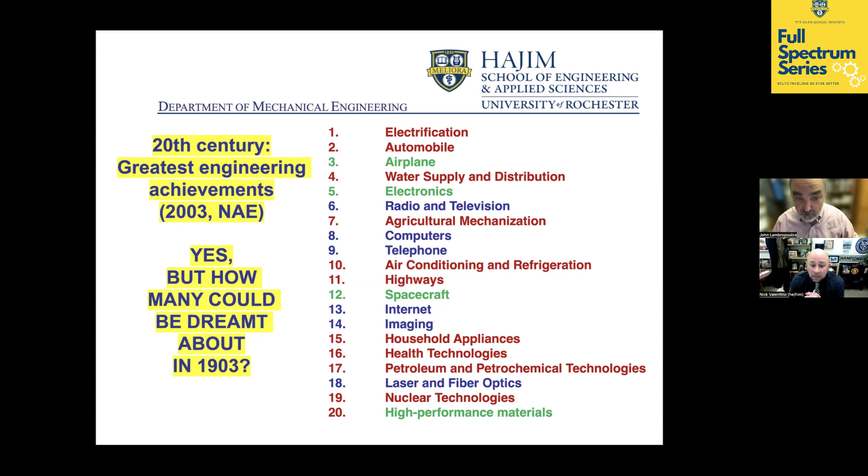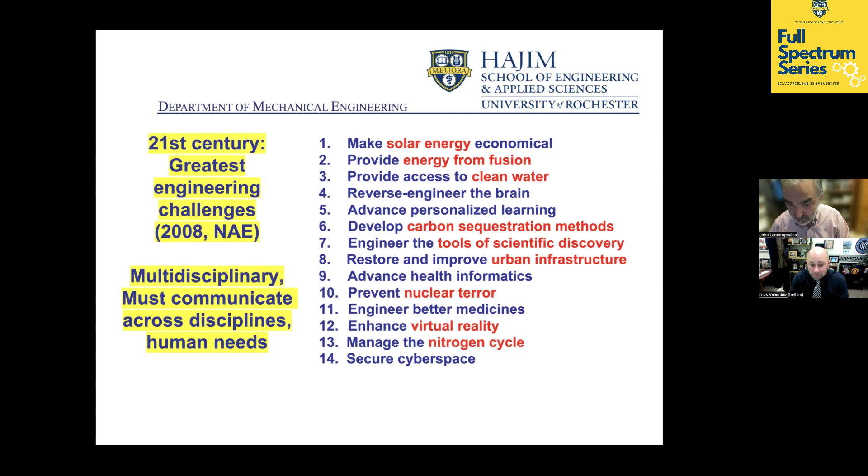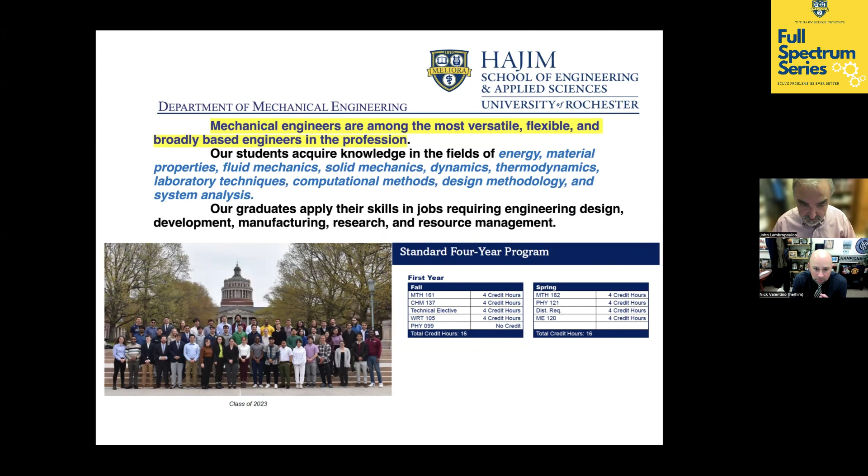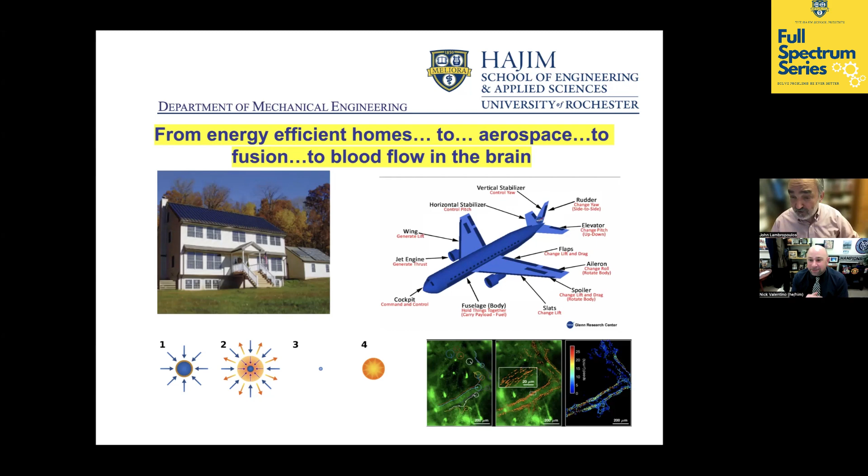We get reminded of that being so close to the airport on campus. You'll see a massive plane fly by, and they're like, 'Oh my gosh, it actually flies.' We're about 6 miles from the Rochester airport, so on the U of R campus you see aircraft flying over the campus all the time. We admire it all the time.

Let me talk about something I haven't quite mentioned explicitly, and that is engineering is a profession. I want to emphasize this. Just like every profession, we have a professional code of ethics. I always ask, if I give this as a live presentation to students, does anybody here think of themselves as not being ethical? Of course, nobody. We all think of ourselves as being ethical. Every single person thinks, of course I have my personal ethics. But the point I want to make is the distinction between professional ethics and personal ethics.

In order to highlight this, I have a purpose statement, and I ask the students or anybody else, is this true or false? 'Engineers, in the fulfillment of their professional duties, must carefully consider the safety, health, and welfare of the public.' This sounds terrific, like apple pie, motherhood. It sounds terrific, but the statement is actually false. It is false because engineers do not merely carefully consider safety — safety must be paramount. I always rephrase this to students: if I have carefully considered the safety of my car, does this mean my car is safe? Safety is the paramount factor in all engineering practice. I cannot overemphasize this.

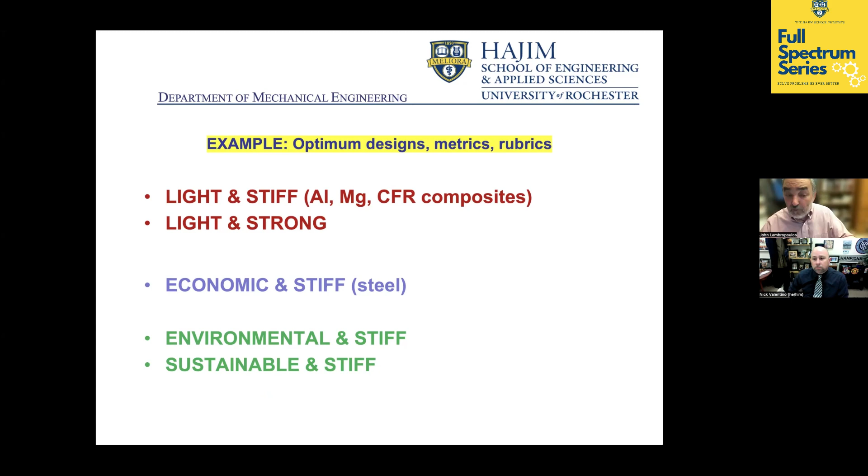What is environmental, what's sustainable, is even a political issue. If you read the literature, the debates of the campaigns, you see what is sustainable, what's environmental, what is economic clearly plays a very big role in our political life.

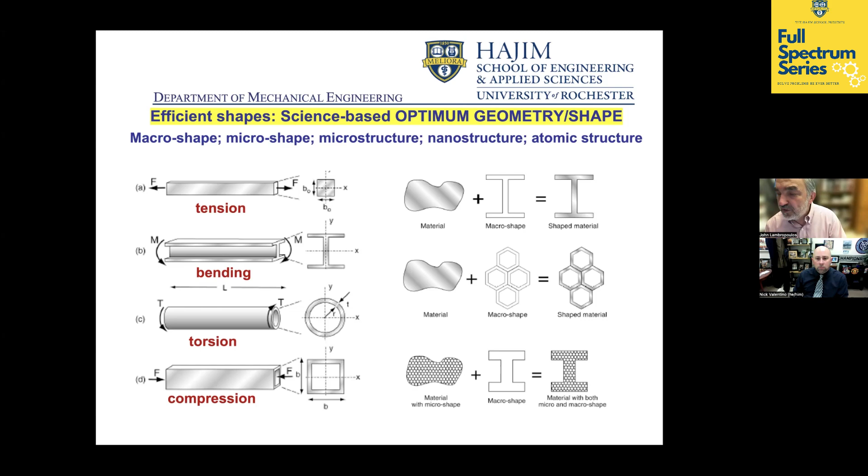Something we emphasize in aerospace engineering is that every complex engineering structure, no matter how complex, is always analyzed in the four fundamental modes of deformation: tension, which may cause breaking; bending; torsion, something that's twisted or torqued; or compression. Each of these materials has a different cross-section. The point I want to emphasize is that these structures are made not just from a solid material, but from a solid material which may have a shape attached to it. So by optimizing the shape, I can optimize the performance of the material while minimizing its weight. That's what aerospace engineering is all about.

I'll give an example of the challenges aerospace engineers face, both for commercial and defense-related aerospace. Here's an example of a gas turbine, which has very high efficiency because it can operate at temperatures up to 1200 degrees Celsius. Just to give an idea, a gas turbine is twice as efficient as a traditional fossil fuel power plant. Twice the efficiency is a tremendous engineering accomplishment, but the temperature required is on the order of 1200 degrees Celsius.

And at that temperature, every known material that we have easy access to is essentially a liquid or like a soft cheese — it becomes almost the consistency of brie. Therefore, I cannot build structures with that.

Therefore, the need for advanced materials that must withstand higher temperatures is a huge capability in aerospace engineering. And therefore, the idea of gas-related technology is important. So let's talk now a little bit about this.

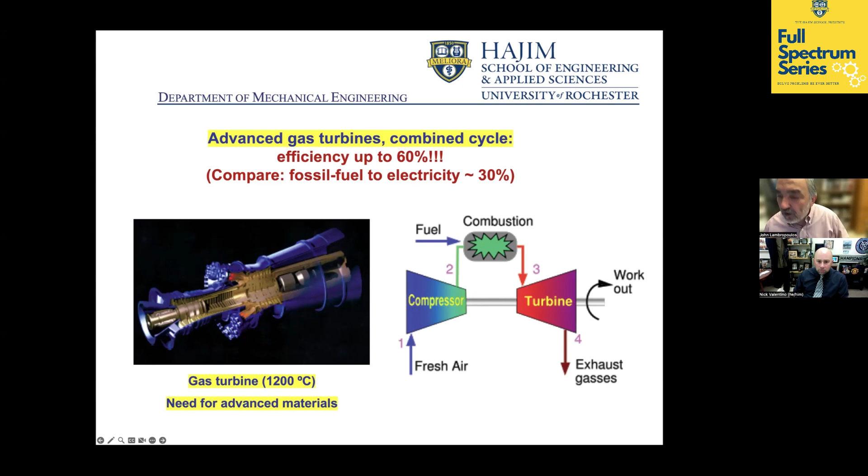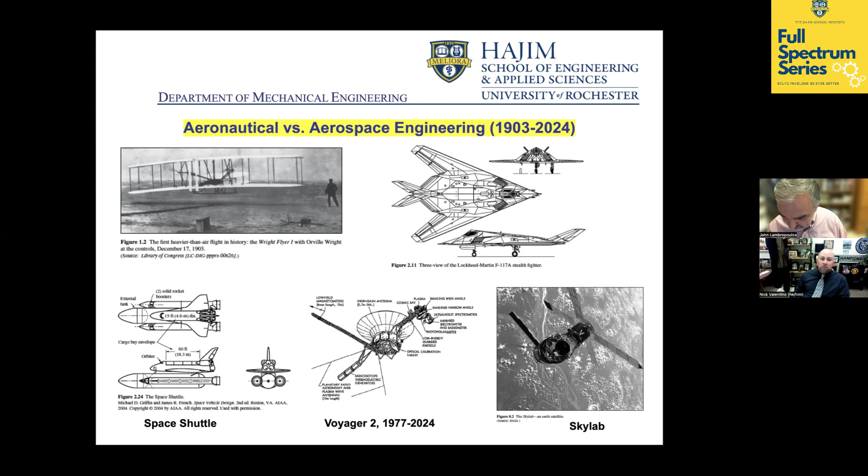Just to give you a more recent example, SpaceX, Elon Musk's very visionary company - one may like or dislike his political inclination, but that's a different story - the technology that makes SpaceX rockets viable and very impressive is that they have these active cooling mechanisms, which are very sophisticated.

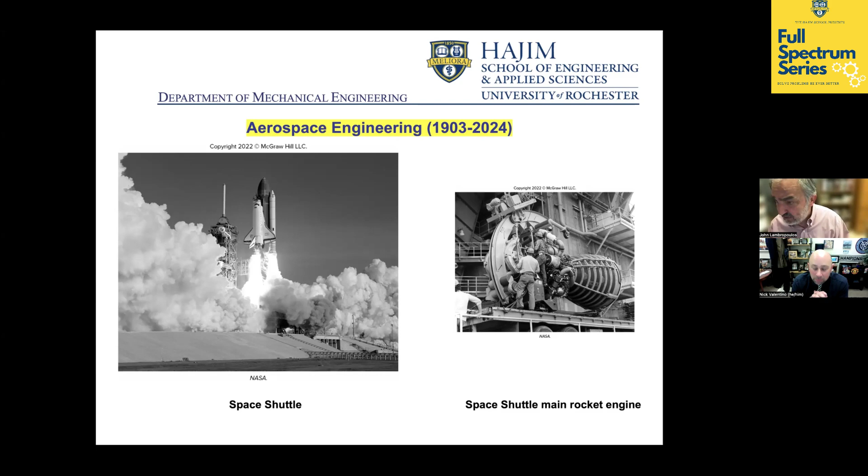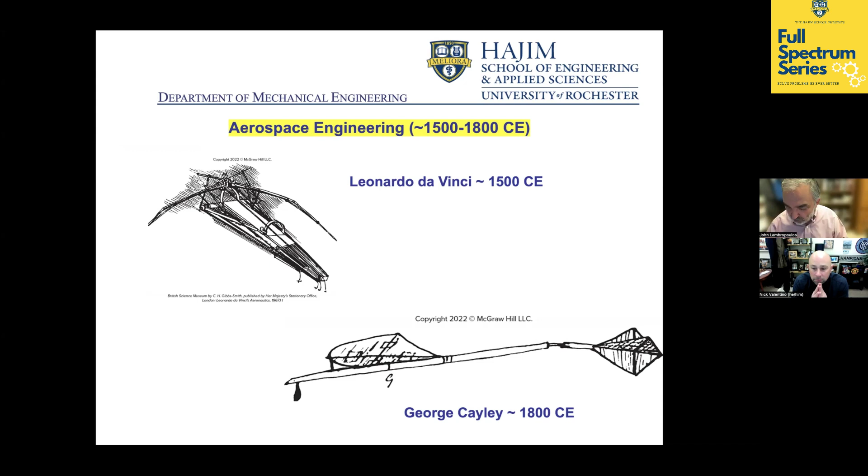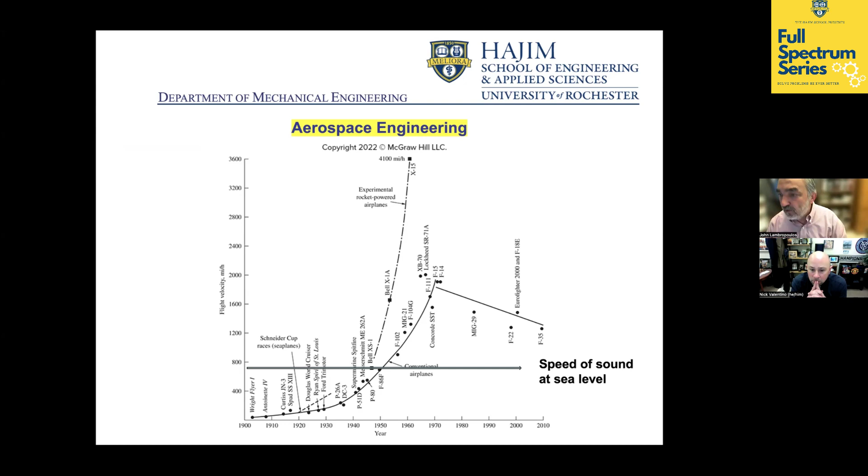I'll talk about this in just a minute. If you look at the data on the right-hand side—MiG, a Russian aircraft, F-22, F-35, the Eurofighter 2000—you'll see that these operate at about Mach number 2, about twice as fast as the speed of sound, which begs a very interesting question: why not try to go even faster for defense? It's a very important capability, because if you try to operate much faster than this, you sacrifice thrust, you sacrifice drag, and you sacrifice maneuverability. Therefore, you need to optimize a variety of different conditions to have a viable defense-related aircraft.

One point we try to convince students of is that everything that flies is exposed to the exact same four forces: lift, what creates lifting; drag; thrust, what creates thrust; and of course the weight. Everybody is familiar with what weight is—you step on a scale, 160 pounds, 180 pounds, and so on and so forth.

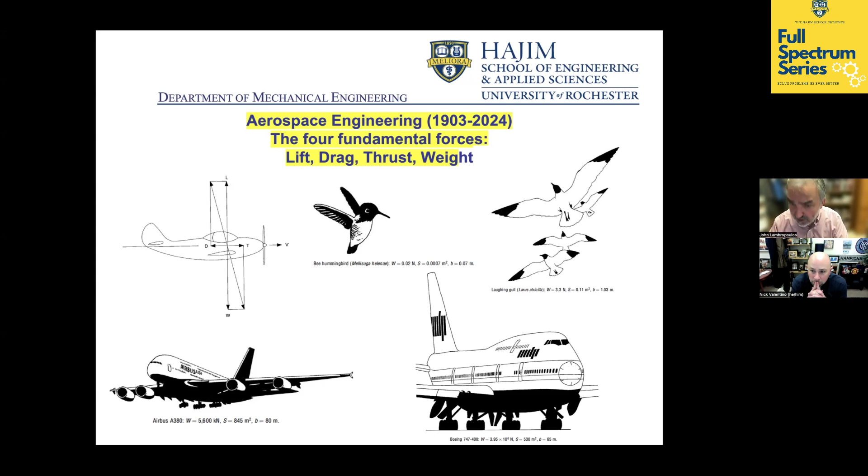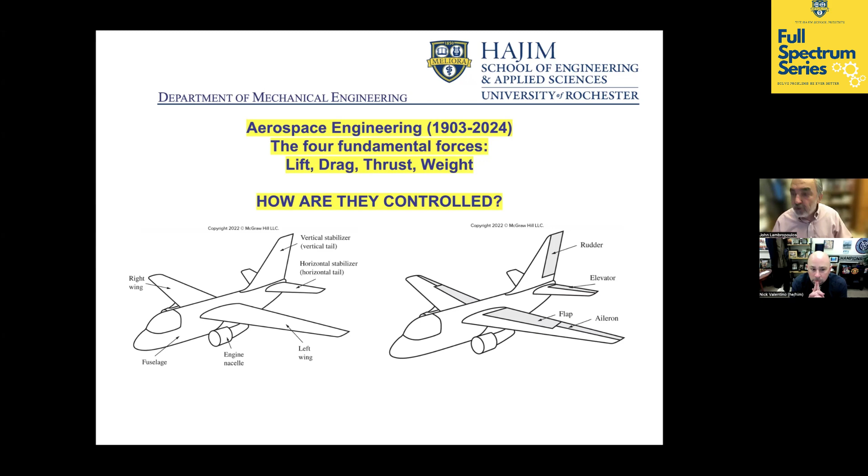The point I want to emphasize is that if you're walking on a floor, or if you drive a car, it's very easy to make a turn, because contact with the road ensures that you can actually make the turn, or I can stop immediately on my tracks if I'm walking on Earth. But an aircraft cannot do that. So an aircraft needs these additional geometrical structures to ensure that flight can be accelerated, slowed down, and so on and so forth.

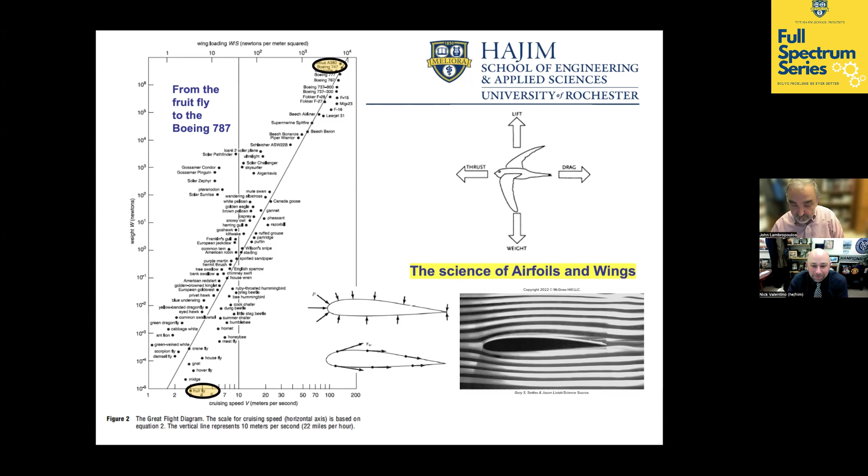Oops. Amazing. What happened here? There we go, there we go.

Let's talk about the science that everybody will understand. Aerospace engineering has two critically important numbers. One is the Mach number, which tells you how much faster you move than the speed of sound. The critical values: 0 is standing still, 0.3 is like a two-seater airplane you see on a nice sunny Saturday morning, Mach number 1 is breaking the sound barrier, and Mach number 5 and above is what we call hypersonic. This creates incompressible subsonic, compressible subsonic, supersonic, and hypersonic regimes.

So these ideas are discussed in a technical context in aerospace engineering. The second important number is the Reynolds number, which distinguishes laminar versus turbulent flows. Laminar flows are wonderful because they minimize drag, but turbulent flows are a reality of life. So the idea is you need to live with turbulence. Understanding turbulence is a huge technical problem.

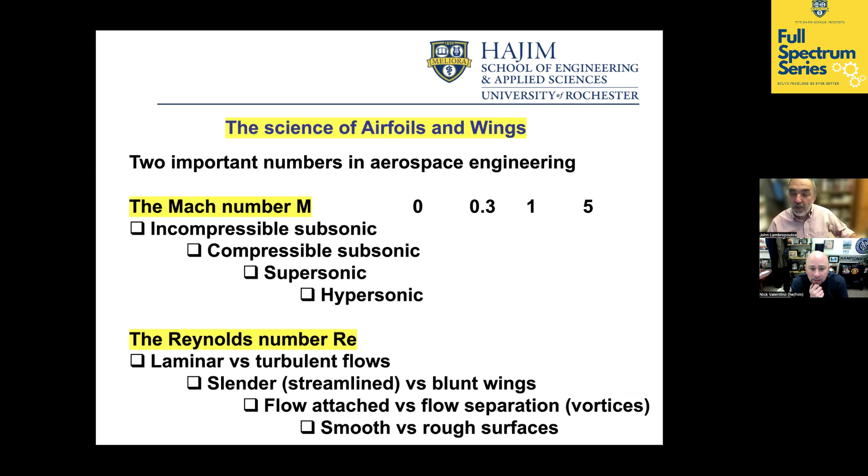What distinguishes blunt versus streamlined or slender geometries is whether the flow is attached or separated. Flow separation leads to what we call stalling. Stalling is very bad because when something stalls, it loses lift, so you essentially free fall through the air. And lastly, what's the effect of smoothness or roughness of a wing or aircraft body on this correlation?

Let me talk about propulsion because this is very exciting. The standard propulsion technology is called the propeller. The geometry of the propeller is essentially an airfoil, essentially a wing. So a propeller creates thrust in the direction in which the lift force is being created. This is old technology, and it involves essentially the reciprocating engine.

On the bottom left, I have a little gadget demonstrating something the ancient Greeks actually invented, showing how using steam one can create motion. But this did not produce the steam engine, because it was more like a curiosity, a gadget one would show to wealthy friends over dinner, saying, look at this cute gadget somebody gave me.

Perhaps the most important part for modern technology is the turbojet, the jet engine, which essentially uses combustion of a gas in order to create very high exit speeds, which therefore create thrust in the forward direction.

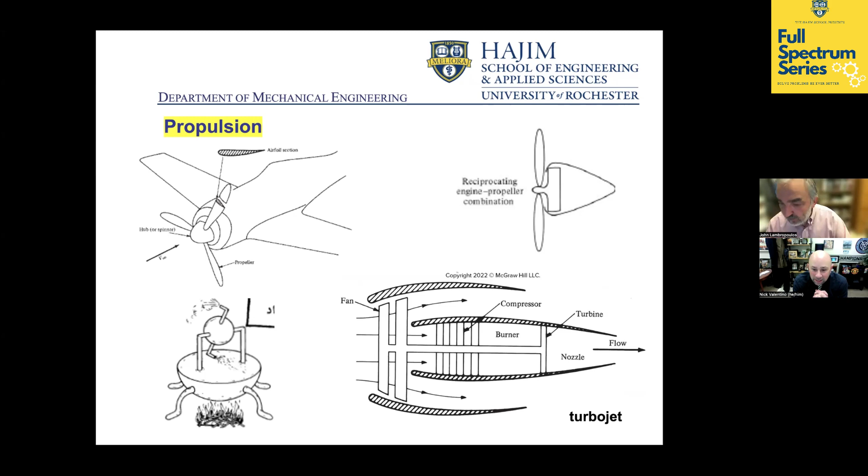So the point I'm making here is that each of these components is separate, but the system is a collection of these components. Going back to what mechanical and aerospace engineers actually do: assess the problem, analyze each component separately, and then design the system. This is a different kind of technology.

You'll see on the top right, this is a turbofan. These gigantic jets like the Boeing 747 and the Airbus 380 are all driven by turbofans. On the other hand, turboprops are used for smaller, executive style jets, like Lear jets and so on, which begs the question: why do big flying objects use a turbofan and smaller flying objects use a turboprop?

It turns out that both the turbofan and the turboprop are not good enough for defense applications because you need to go significantly faster. So now we're looking at the Ramjet and its more recent incarnation, called the scramjet. Essentially what the Ramjet is, it's exactly this: you have that ram on the very front, and if this ram moves through air very rapidly, it compresses air because it simply rams into the air. Therefore, compression takes place automatically, for free, if you like.

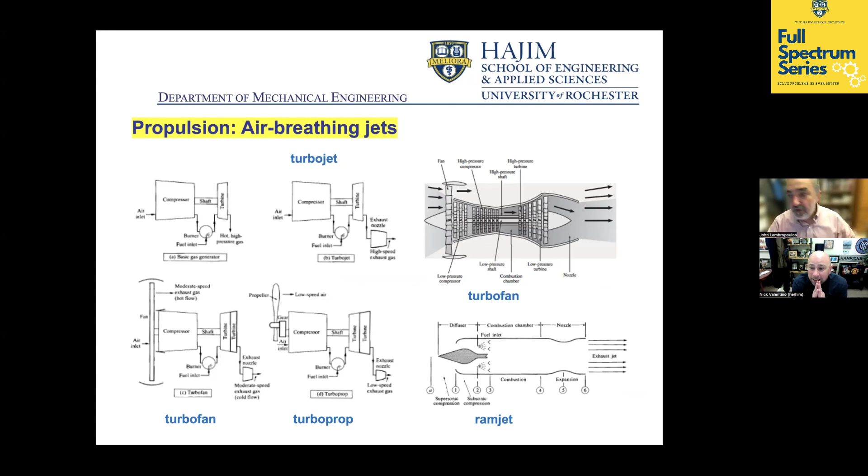The only problem with this technology is that to get this to happen, you must already be moving at a very high speed. So the question is, how do you move at a very high speed? Somebody has to lift this device up in the air, give it a high enough speed, and then it becomes self-propelling. Therefore, you see how the different components create different issues, each is solved separately, and then we put the full system together.

Let me talk a little bit about wind tunnel testing. First, you will see on the top, this is the NASA Ames Research Center. You can see from here the size of the cars. This is a very big wind tunnel, which NASA uses to test airfoils, and a lot of this information is actually passed on to the wider aerospace community.

This is the example of what we call a subsonic wind tunnel. In the middle, we have a supersonic wind tunnel. And on the bottom, we have the exact same idea, called the rocket engine nozzle. You will see that the supersonic wind tunnel and the rocket engine nozzle have a lot of similarities and a lot of differences. On the right-hand side, you will see what a rocket engine nozzle actually looks like in relation to a human being, and this geometry next to the human being looks identical to the geometry of the rocket engine nozzle on the left-hand side.

As a matter of fact, this problem of the rocket engine nozzle was on the first midterm exam that the students took in Introduction to Aerospace two weeks ago. The students did very well, the average was about 90. My point is that we analyze problems which are relevant to aerospace with a very guided amount of information in aerospace, instead of saying, oh, I'm going to read everything I can on Google or Wikipedia about aerospace engineering.

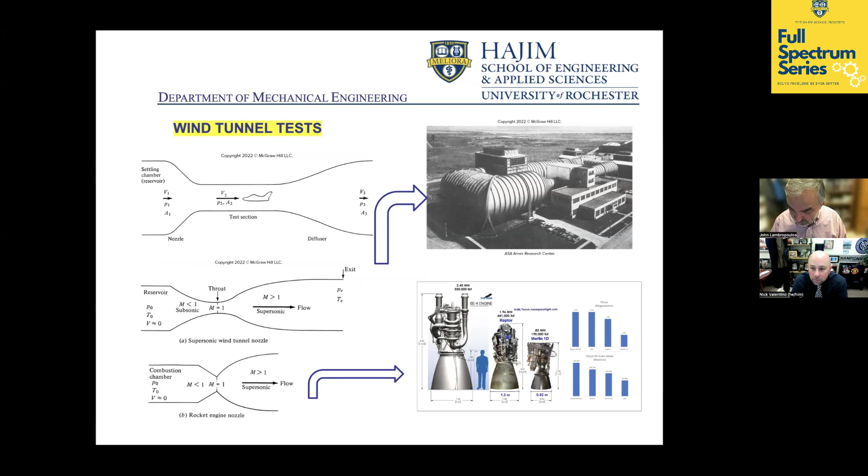The last slide I want to talk about is space propulsion rockets. The person you see on the top left is Robert Goddard. The NASA Goddard Space Center in Maryland is named after him. He was very unfortunate because he was the father of rocketry, but he died before rocketry actually became a reality. He died very unhappy, very unrecognized, and essentially very lonely, which goes to show that technology sometimes is so advanced that the rest of the world does not appreciate how breakthrough that technology actually is.

For the case of the space shuttle, for the case of rockets, the rockets must carry their own fuel and oxidizer. For earthbound applications, air is the oxidizing medium, it has a lot of oxygen in it, about a quarter fraction of air is oxygen. But in space, there's no air, there's no oxygen. Therefore, I must carry separately the fuel and the oxidizer. The technology for how you carry these two separately, and how you make sure that they don't mix before the intended mix-up process, is absolutely fascinating. Huge technology by NASA in there.

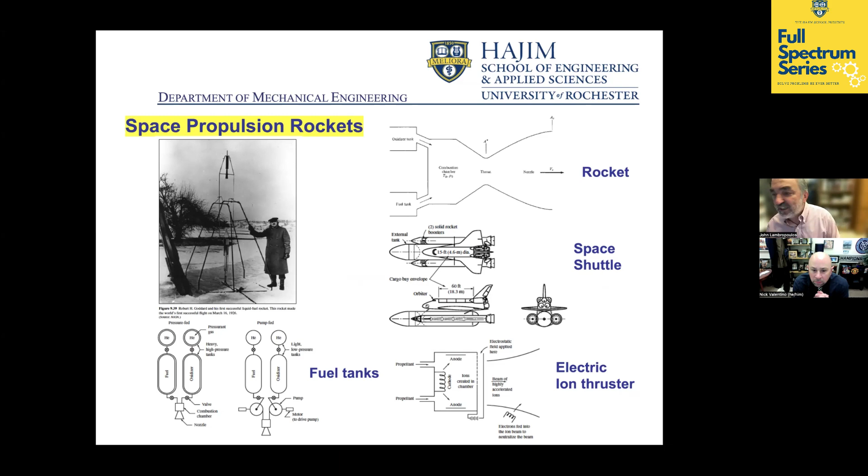Now, it turns out that when you look at really outer space, there's nothing to retard motion. Therefore, you simply need a little bit of a push, and this will take you very, very far. An example of this is the electric ion thruster, which ejects ions at a very slow rate, and as a result, motion takes place in the opposite direction, just like a rocket, but there's absolutely no resistance.

The last slide I want to present is that clearly in aerospace, there are a lot of defense-related applications. Right now there's a war going on between Ukraine and Russia. There's a lot of military action in Israel, Gaza, and Lebanon, and in Yemen. The world is afire, so to speak. The point I want to make is that a lot of this military technology, by necessity, is related to aerospace.

Maybe in the Olympics, yeah. But as we know by now, in the Olympics, Russia did not take part in the most recent Olympics. They did not take part in the most recent World Cup. Therefore, in the exploration of space for humanity, there's massive collaboration.

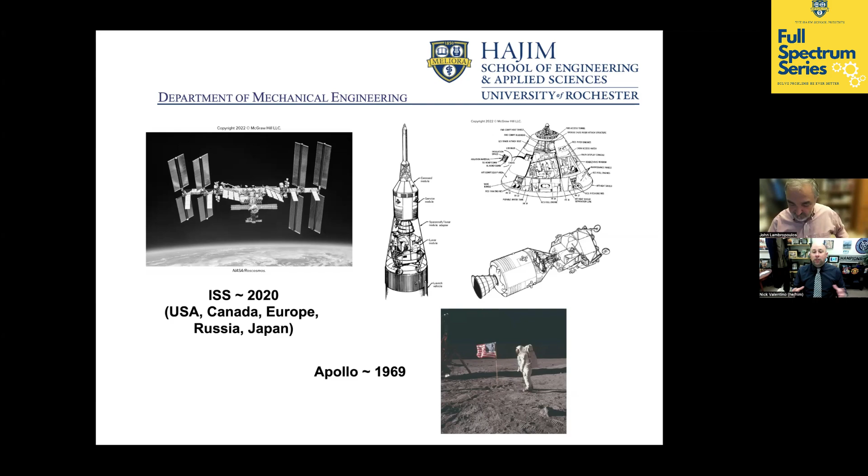I wanted to ask you a little bit about the assess, analyze, design process, in terms of what does it look like in terms of time spent for each, and who is this done with? So when you're in each section, how does that look like for a young scientist or somebody who's interested in those three parts?

So let me go to the very beginning. In the past 35 years, I have consulted for upwards of 40 to 45 companies, small companies and large companies, over 35 years.

When a problem is actually described by a corporation, big or small, they know there is a problem, but they cannot even describe what the problem is in a technical context. If they say 'change this material from aluminum to steel,' then they don't need somebody with knowledge to do that. But they say, 'I have this material, and it seems to fail about 10% of the time. I cannot afford a 10% failure rate because my customers are not happy.' What's going on? So they don't even know.

So assessing means you need to provide a quantitative context for identifying the problem. It's not sufficient to say, well, if I'm Wilbur Wright, I need to design the Wright Flyer 1 to take me from the Earth, to fly at a height, for a distance of less than a mile. I need to take this problem, break it down into individual components, assess the difficulty, complexity, or ease of each component separately, and then put this together.